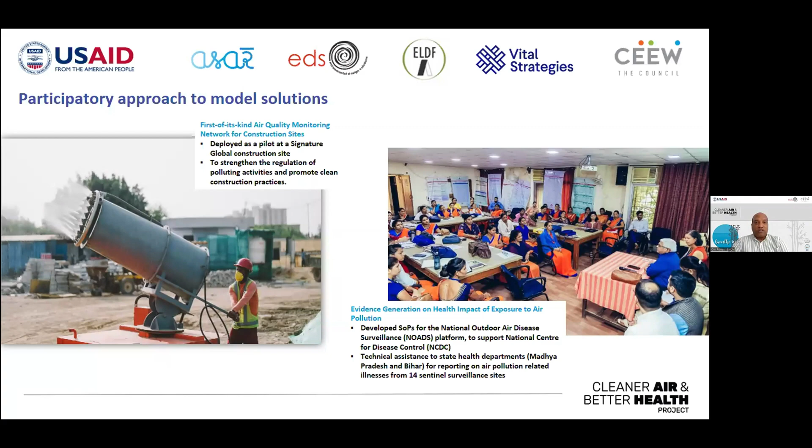Another area we have been working on is evidence generation on the health impact of exposure to air pollution. Here we have developed standard operating procedures for national outdoor disease surveillance platforms to support NCDC, wherein they report air pollution related diseases. We are providing technical support to the government of Madhya Pradesh and Bihar on how we can activate and sustain these 14 surveillance sites, which can be a model for the rest of the country to follow.

On the supply side, in the transition to clean cooking fuel, we are exploring business models to increase affordability in terms of grants, carbon credits, and microfinance, where we are piloting with self-help groups how they can be more employed at the ground level as a last mile delivery mechanism.

We have conducted the largest LPG distribution survey in the country, which has resulted in a policy change and influence in the country to influence LPG distribution and access.

On the demand side, as I talked earlier, we are working with 12 clean air action hubs, where they provide support and enable ambient and household air pollution mitigation measures. This is completely a voluntary mechanism, a non-organized thing wherein the active citizens of a particular city come together and be the voice for air quality management in their areas.

We have developed a first-of-its-kind natural gas furnace, which is under patent right now. We are in the process of doing the patent on that. This whole work is being done in partnership with SIDBI, Torrent, and Moradabad Smart City, and the artisans there. This whole innovative design has demonstrated a 98% reduction in PM2.5.

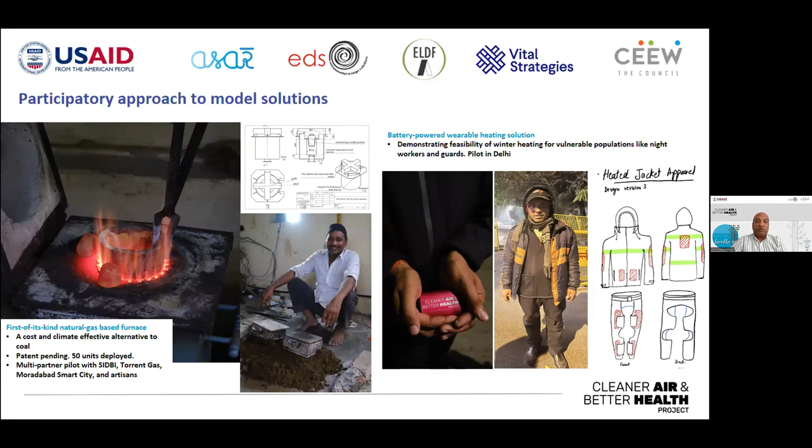Another innovation done under this project is basically a battery powered wearable heating solution. This is especially well accepted right now within the Delhi area, wherein the vulnerable population which works at night, like guards or workers, are being provided with these heating jackets, which can be regulated, temperatures can be regulated, so that it may result in reduced stable burning and hence less emissions in the air.

One of the models that we are working on in the mobility sector is the transition of diesel autos to electric autos. For this, we have run a campaign on three-wheelers in Amritsar, and we have gotten some very exciting results to cheer on.

We had almost 220 auto drivers who have been given these autos for piloting for 3 days. We have been able to transition 750 diesel autos to that.

We also have a special focus on the engagement of women right now. For this purpose, through the CABH project with ASAR, we have been able to get a government priority as a pink auto scheme for 200 women drivers. Now we have identified 108 women drivers who are engaging themselves for moving on this.

This is the whole campaign, 'Sartaj, my electric friend,' in Punjab, that resulted in that.

As I talked about the decision support system that we have been working on, we are piloting it right now in Thane. Here we are also integrating construction and demolition dust management protocols, so that this gives a kind of strategic direction to the Thane Municipal Corporation to take appropriate steps to manage emissions in the future.

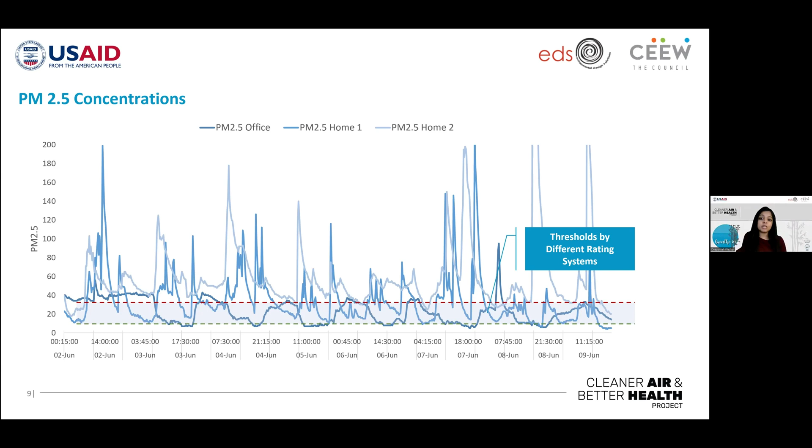As part of the CABH project, we undertook monitoring of indoor air quality parameters in different types of buildings. I'll take one example of PM 2.5 measurement in 3 types of spaces - 2 residential and 1 office space. The point to notice is that acceptable threshold limits for PM 2.5 concentration across different systems vary, from less than 15 micrograms per cubic meter to 35 micrograms per cubic meter. In all 3 spaces, the PM 2.5 levels were way higher than what the different rating systems allow. So certifications or rating systems hold facilities accountable to the quality of indoor air provided, by ensuring actions are taken to keep indoor air quality parameters within set thresholds.

Moving on, I'd like to invite Stanton, who will present the RESET Air certification program, covering its key features and benefits. He will also cover case studies demonstrating success stories from certified projects.

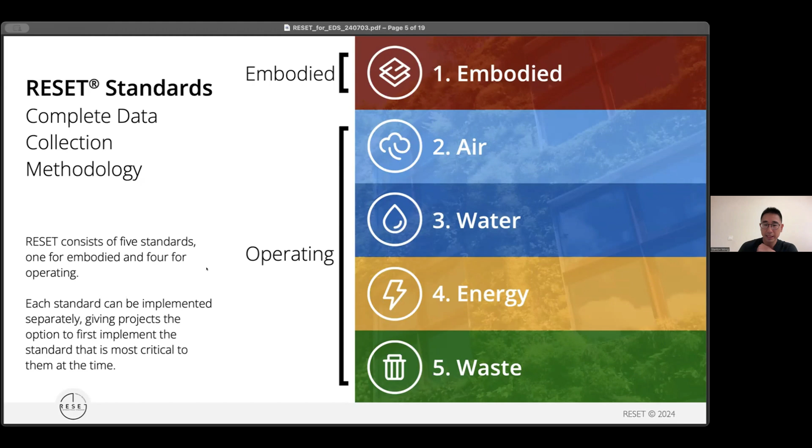With that said, we're going to now dive into air. The tagline that I like to use is that RESET Air is about seeing the invisible.

The genesis of RESET Air as a standard was back in 2014, and it was because in China, there was a documentary that came out talking about how the fog that we saw outside was not fog, but actually air pollution. That documentary made everyone realize that we have an air quality problem.

But most people understood it as an outdoor air quality problem, not an indoor air quality problem, because outdoor, you can actually see the fog. Indoor, unless you're burning something, you're not going to see the fog of air pollution. You're not seeing PM2.5 at 200 in an indoor environment when you're this close to it. You're not going to see CO2 levels rise to 5,000 ppm indoors. And VOCs—you might smell it, but there are a lot of VOCs that aren't as detectable to your smell. So all of these are technically invisible.

The only way we can really see it is by leveraging technology like monitors and sensors to detect this kind of stuff. With RESET Air, we knew outdoor air quality was an issue. Now we wanted to convince people that indoor air quality was an issue too.

The genesis of trying to move towards monitoring versus just a spreadsheet analysis was—I mentioned earlier that we started with materials. When we were working with materials, we were measuring VOC off-gassing by looking at all the reports for the materials and putting the VOC off-gassing data into a spreadsheet, trying to guess how much VOC was in the space based on the materials chosen. And we were wrong 99% of the time.

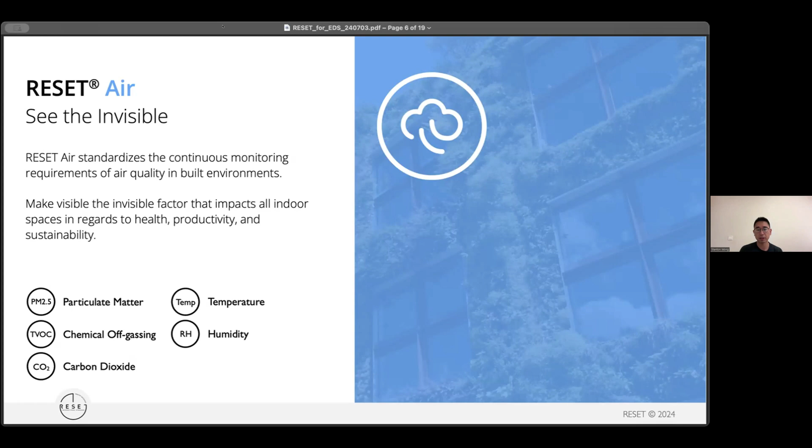The reason was that in every construction project, some material gets switched out, and that material—especially glues or varnishes—if you use the wrong one, it off-gases incredibly strongly, so your VOC numbers are never going to be correct. That already pushed us towards the concept of continuous monitoring to really understand air quality. With the outdoor air quality issue, combined with our understanding of VOCs, that's how we thought of RESET Air as a potential solution to help people understand that indoor air quality is very important—it's something we cannot see, but can be measured if we have the right tools for it.

The problem is, most of the time you're testing at the best case scenario, and you don't know how the building is going to perform afterwards. During the flush-out phase, you have all your windows open and your fresh air systems on full—that's not the case for how you're going to use the space when occupying it. So if you're just looking at a spot test, the problem is you're not actually understanding how the space will perform over time.

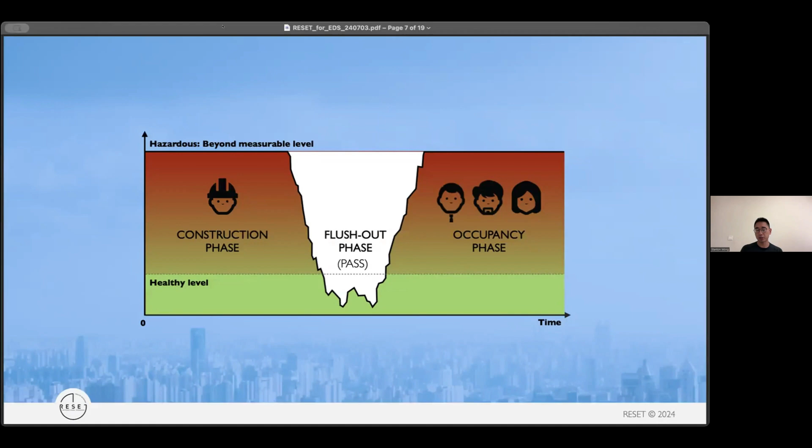Another analogy for this is that a spot test is like a DSLR camera—you get a really high-res understanding of how the air quality is in the space at that moment. A continuous monitoring system is more like a CCTV camera: it's blurrier, you're not going to get absolutely accurate data, but you get the trend—you get to see what's happening over time. So if you're going to catch a robber, you're not going to do it with a DSLR camera, you're going to do it with a CCTV camera.

So in terms of what RESET Air does, as a standard, we don't focus on solutions, we focus only on how you measure the space. One of the things that we do is monitor specifications. There's an entire process that we have for testing monitors, and the focus is on how this monitor performs.

Over time, and is it consistent? So the testing process is 5 monitors. At least our testing process right now is we require a monitor provider to send us 5 monitors. We put it into an actual office space and we run it for 3 weeks, and we're trying to determine two things.

One is, are these monitors from the same company able to perform in a way where they're consistent with each other? The reason for this is because if a company is only able to put these sensors together and deploy it without any kind of calibration knowledge in the team for how to make these consistent across the board, the company is not going to be in a good position to provide monitors that have good data quality, because all they know is actually just putting everything together.

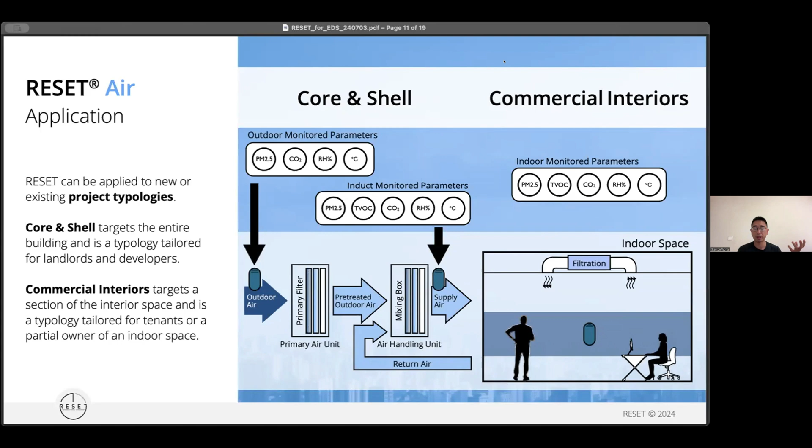So we're going to touch upon a few case studies now, and most of these are slightly older because they're all case studies of certain scenarios that hit during the first couple of years when we were piloting a lot of these concepts. For RESET, because we're focused not on the solution but on measuring, it doesn't matter if it's a new building or an old existing property, all of it's applicable. I'll go through that to explain how different projects have used this, and I'll also mention a project in India.

So the first case study I'll mention is a new build. This is an office tower. The thing they did was they actually went above and beyond the requirements for RESET. They installed air quality sensors on every single floor. This is for core and shell. And with that monitoring, they had hyperlocal information, which meant they knew air quality across the entire building on every floor.

And because it was a new build, there were a lot of new tenants moving in. Hines' approach is that they're very strict on when people can do any kind of construction in the building. In this case, they were only allowing construction to happen at nighttime, nothing during the daytime, because construction generates PM2.5 and VOCs, and they weren't having any of that because the centralized system is shared.

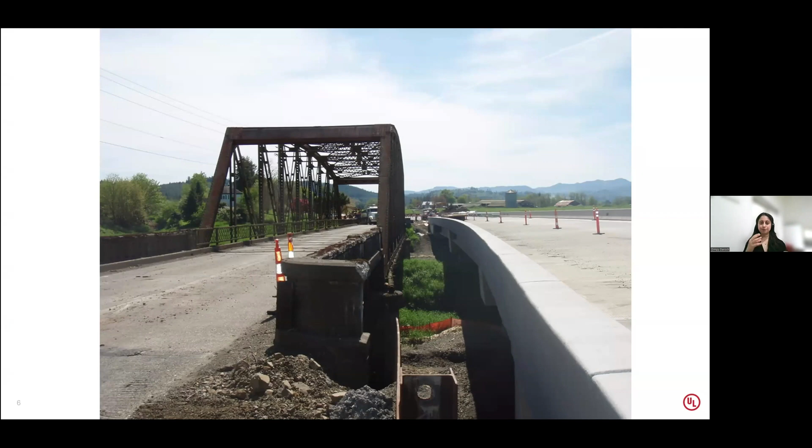Okay, so another picture on your screen. Imagine the scenario: there is this newly built bridge, ready to be inaugurated by somebody very prominent, the CM or somebody maybe. And the performance testing of this bridge was missed. What could probably go wrong? It's not hard to guess.

I'm not claiming that this is what happened here, but these scenarios are not rare. Performance verification is the way you can ensure that a building, a system, a service, or a bridge is working as it was intended to. In fact, performance verification is the only way you can make sure that it does.

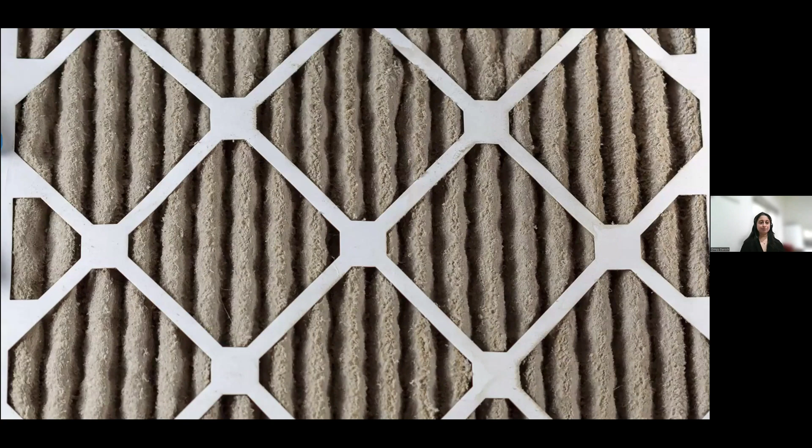Let's bring the conversation to air quality. We all know what this is, it's a dirty filter. If you want to make sure that this doesn't happen, you need to replace it depending on what the filter class is—for a MERV 13, every 3 to 6 months. How would you do that? You need to ensure that there is maintenance happening in the building, right?

If you're sitting inside a building, you don't know whether there is mold under that sink, or how much dust is trapped in the carpet, what your indoor air quality looks like, or how your water quality is, hygiene is, and whether the lighting is conducive to the health and well-being of the occupants, or the noise levels. I strongly believe that a healthy indoor environment is the foundation of a healthy building, and the only way you can ensure that is via performance verification, which is science-backed.

And the Verified Healthy Buildings program, or UL's Verified Healthy Buildings Mark, delivers just that.

I'm going to give you a program overview. This is a tier-based program. All these tiers are additive, and it's a program where you decide what level of commitment you want to go for. So I'll talk about these tiers in detail.

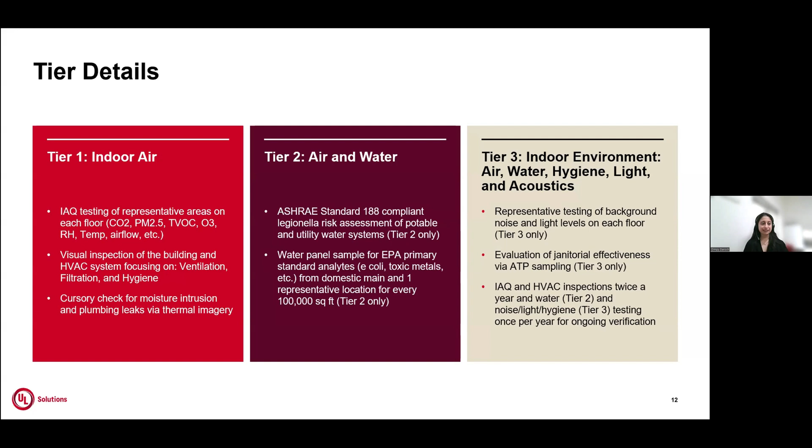Talking about the process, if you're looking for something fast to market - different needs for different people - the process is fairly fast and simple, and does not involve a second party. It starts with you sending us floor plans and your policies on indoor air quality, mold and moisture, and preventive maintenance. Even if you don't have these policies, we help you build them.

Once this policy work is done and your floor plans are with us, we set up a site inspection. This is based largely on the building area, so depending on that, it may take 1 to 5 days, usually completed in 2 days for an average building size in India.

Once the site inspection is complete, within 3 weeks you are submitted a report card, and we request a report card discussion. This forms the basis of your building's indoor environment quality, and if there are issues, we work together to resolve them. Once that's done, you're awarded the UL Verified Healthy Building mark.

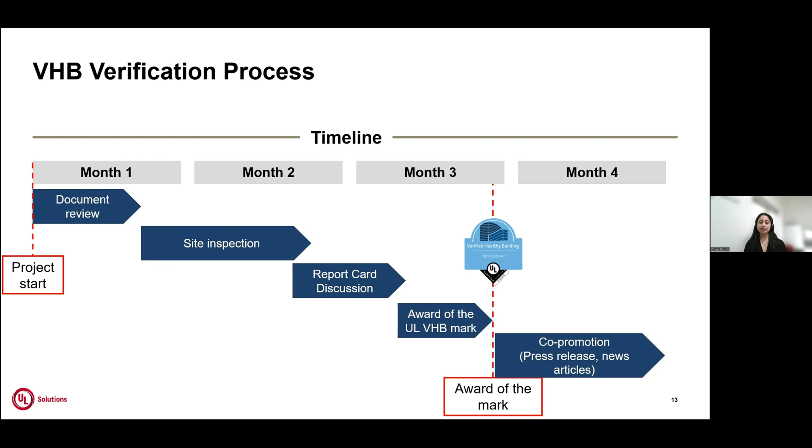This is a super fast way to ensure your building is healthy but also science-backed, ensuring everything is working as intended. We also offer co-promotion with our marketing team, if that is the goal of the building owner or tenant.

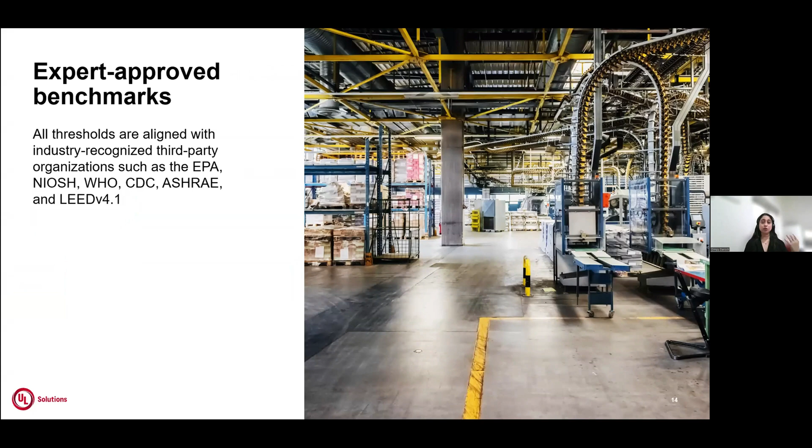The program is based on expert-approved benchmarks, so the thresholds are all as per the global standards that are very well recognized in India.

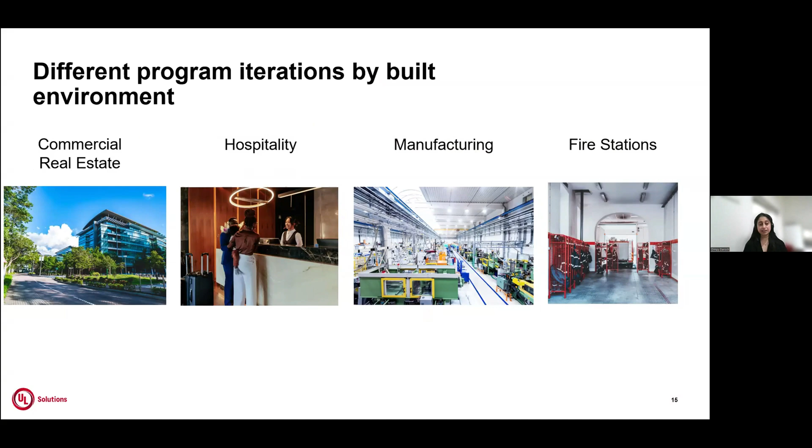This program has several iterations. It's applicable to commercial real estate, hotels, manufacturing sites - we even did it for a fire station. And recently, just about 2 months ago, we launched the new construction part of the program, which is also applicable to the residential sector. So if somebody is looking at getting certified across portfolios, this could be a single mark that works for all of them.

Like I mentioned, we all coexist - there are crosswalks, and the program is aligned with WELL or Fitwel, and even programs like GRESB disclosures that the real estate industry does.

Okay, and now I come to the final part of my presentation, which are the 2 case studies I'm going to talk you through. The first one, very close to heart, is RMZ Infinity.